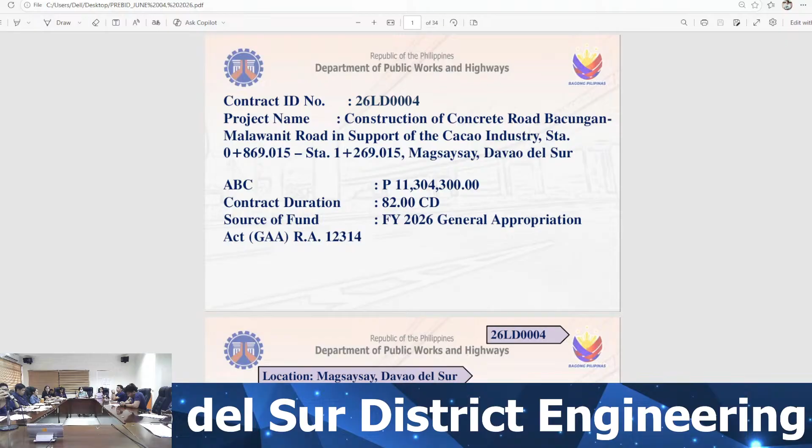Good morning, Madam Chair, my colleagues and visitors. I'm Barry Apitan from the planning design section, to discuss the three road projects.

First, with ID number 26LD0004, the project name is Construction of Concrete Road, Bacungan-Malawanit Road, in support of the Cacao Industry, Station 0+869.015 to Station 1+269.015, Magsaysay, Davao del Sur. ABC amount of 11,304,300 pesos, contract duration 82 calendar days. Source of fund FY26, the Appropriation Act RA 12314. Location: Barangay Bacungan, Magsaysay, Davao del Sur.

The project is shown in blue. Scope of work: concreting existing gravel road with a width of 6.7 meters or 3.35 meters, thickness of 0.28 meters with a shoulder width of 1.5 meters. The length of this project is 400 meters or 0.8 lane kilometer. There is also installation of paved shoulder with a thickness of 150mm and a width of 1.5 meters.

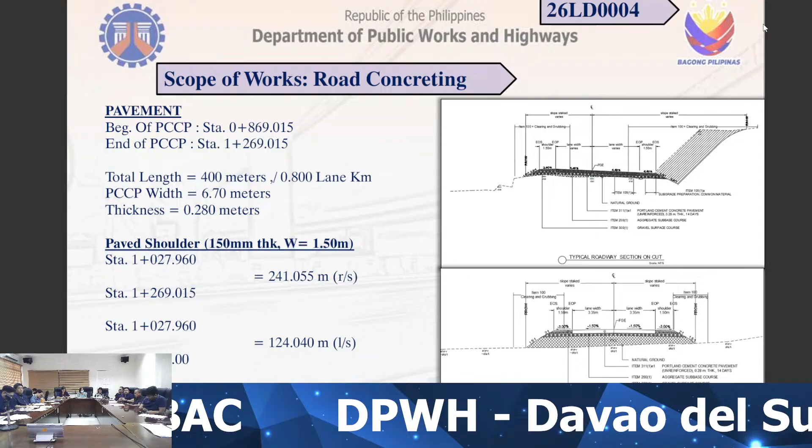Location at Station 1+027.96 to Station 1+269.015, a length of 241.055 meters, right side. Next, Station 1+027.96 to Station 1+160, a length of 124.040 meters, left side. Next, Station 0+980 to Station 1+000, a length of 20 meters, left side. Showing on screen, the typical roadway section and cut and fill portions of the project. There is also super elevation and widening block on this project.

Next, there's installation of RCPC using Class 4. On screen, the vertical sections show RCPC type 1 head wall. Next, on screen, the typical details of the head wall using stone masonry. Next, schedule of reinforced concrete pipe culverts using Class 4. First, lateral drainage on the left side of Station 1+078.295 to Station 1+086.295: install one line new 910mm diameter by 8 linear meter with head wall on both sides using stone masonry.

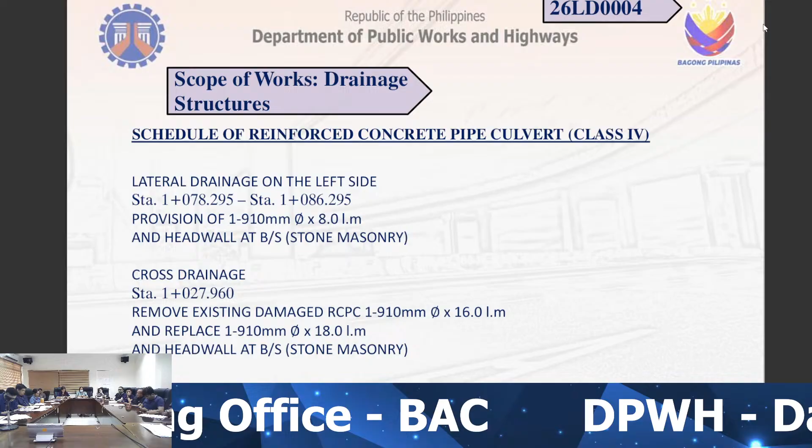Next, cross drainage location at Station 1+027.96: remove existing damaged RCPC one line 910mm by 16 linear meter and replace with one line new 910mm diameter by 18 linear meter, and provide head wall at both sides using stone masonry.

There's also installation of rectangular concrete line canal using 3000 PSI Class A and reinforcing steel bar grade 40. Location at Station 1+027.96 to Station 1+269.015, right side, a length of 241.055 meters. Next, Station 1+027.96 to Station 1+078.295, left side, a length of 50.33 meters. Next, Station 1+086.295 to Station 1+160, left side, a length of 73.705 meters. Showing on screen, the typical details of the line canal.

Clear width of 0.6, clear height of 0.7, and a thickness of 0.15 meters both sides.

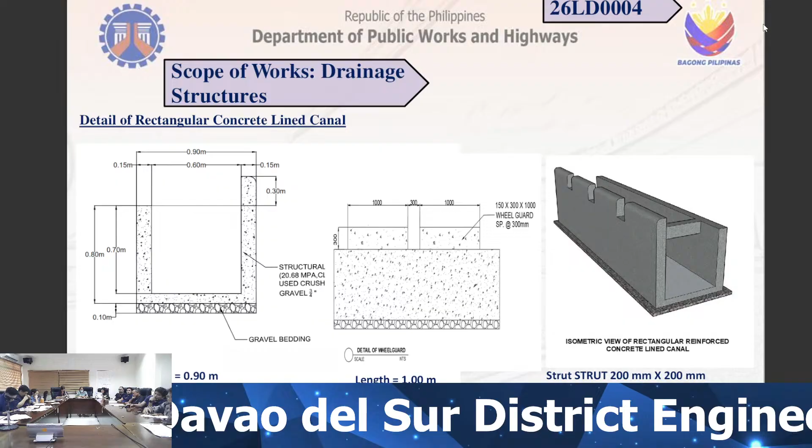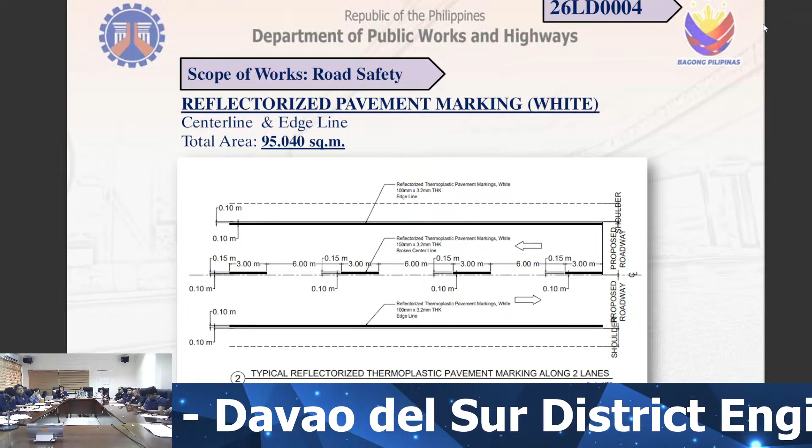Source of fund: FY26 Appropriation Act, RA 12314. The location is at Barangay Tres de Mayo, Digos City, Davao del Sur. This connects to last year's project in FY 2025.

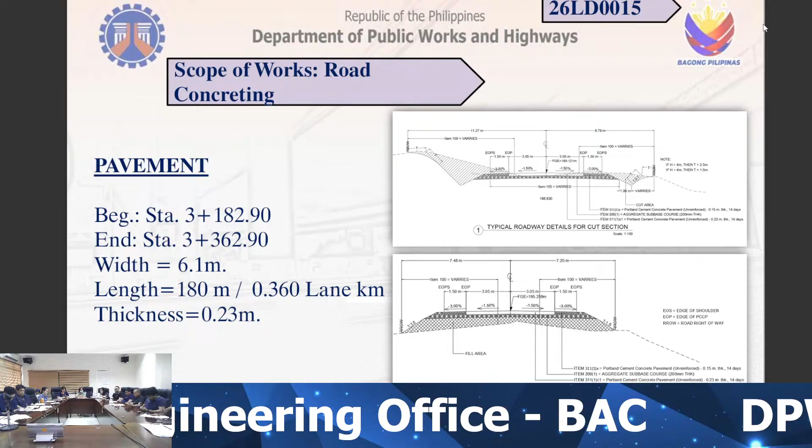Scope of work: concreting of road from Station 3 plus 182.9 to Station 3 plus 362.9, width of 3.05 meters both sides or 6.1 meters total, a length of 180 meters or 0.360 lane kilometer, and a thickness of 0.23 meters, with a shoulder width of 1.5 meters both sides. Showing on screen are the typical road details for the cut section and fill portions of the project.

Another scope of work: we install reinforced concrete pipe culverts using Class 4. Showing on screen is the river section of the RCPC with type S1 headwall, and the typical plan of headwall using stone masonry.

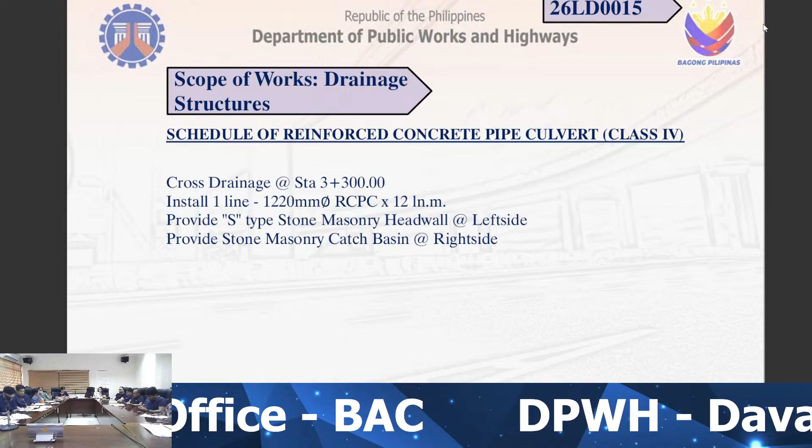Location for the reinforced concrete pipe culverts using Class 4 is at cross drainage Station 3 plus 300. Install one line new 1,220 mm diameter RCPC by 12 linear meters, and provide S-type stone masonry headwall on the left side and catch basin at the right side using stone masonry.

For road safety, we install thermoplastic pavement marking color white for the center line and edge lines of the project, an area of 45 square meters. That's all for contract 26LD0015.

Next, with contract ID number 26LD0017, project name Construction of Concrete Road, Tubod-Libertad-Bitaug Road, connecting Tribal Weavers Association (TWWA) and Davao-Cotabato Road, Cotabato section, in support of the weavers industry, Station 3 plus 247.74 to Station 3 plus

587.32, and Station 3 plus 977.09 to Station 4 plus 137.51, Bansalan, Davao del Sur, with an ABC amount of 11,586,540 pesos, contract duration 84 days. Source of fund: FY26 Appropriation Act, RA 12314.

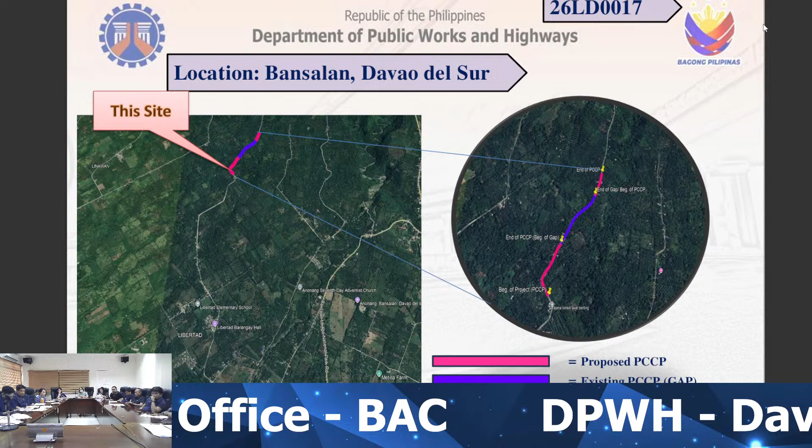The next site is at Station 3 plus 977.09 to Station 4 plus 137.51, a length of 160.42 meters, Site 2. There's also installation of paved shoulder, a thickness of 150 mm and width of 1.5 meters.

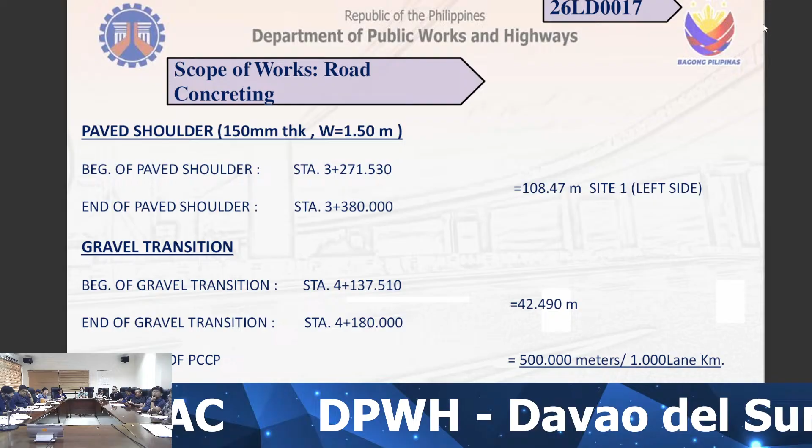The paved shoulder begins at Station 3 plus 271.53 to Station 3 plus 380, a length of 108.47 meters, located on the left side at Site 1.

There's a gravel transition, a length of 42.49 meters. The length of this PCCP is 500 meters or 1.0 lane kilometer, with a width of 3.35 meters both sides or 6.7 meters, and a thickness of 28 cm.

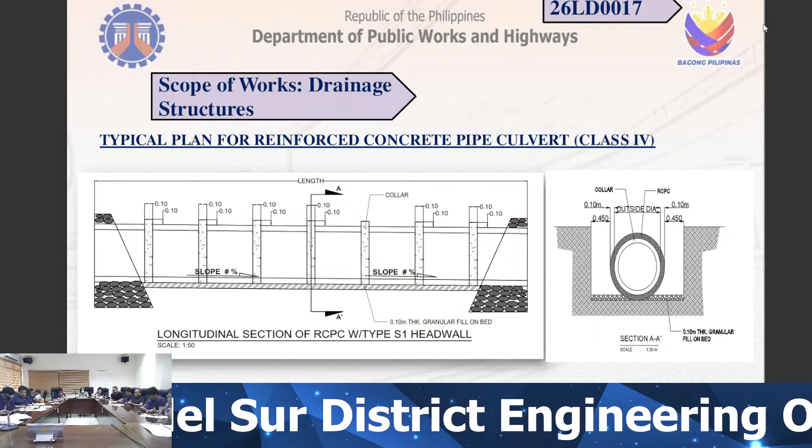Scope of work: installation of RCPC using Class 4. Showing on screen is the divided RCPC with Type S1 headwall, and the divided catch basin using stone masonry.

Next, application of reinforced concrete pipe culverts using Class 4. First, cross drainage at Station 3 plus

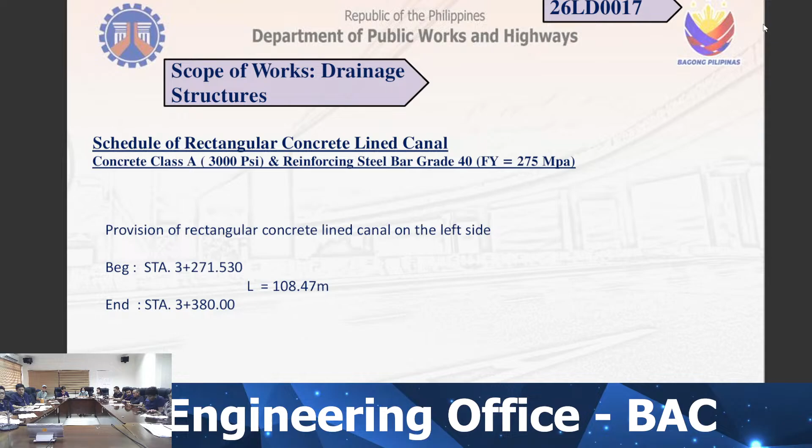Another scope of work is the installation of rectangular concrete lined canal, using concrete class A, 3,000 PSI, and reinforcing steel bar grade 40. Location is at station 3 plus 271.53 to station 3 plus 380, with a length of 108.47 meters on the left side.

Showing the typical details for this rectangular concrete lined canal: a clear width of 0.9 meters and a clear height of 0.9 meters. Thickness of the wall of the canal is 0.15 meters on both sides, and we use gravel aggregate for the canal bedding.

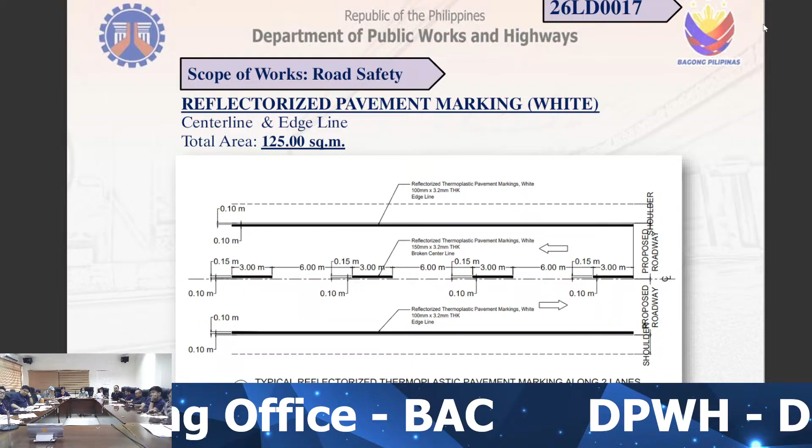Next, for road safety we install reflectorized pavement marking, color white, for the center line and edge line of the project, with a total area of 125 square meters. We also install reflectorized pavement marking, yellow, for the non-passing zone, with a total area of 8.89 square meters. That's all for the road projects.

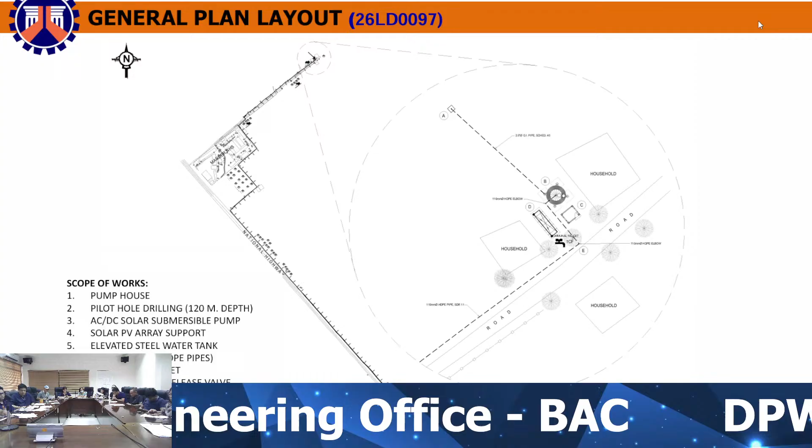This project is composed of pump house, pilot hole drilling, AC/DC solar submersible pump, solar PV array support, elevated steel water tank, pipelines, running faucets, and other appurtenances.

Typical details for pilot hole drilling, using a hole drilling rig. It can penetrate 250 mm diameter at 120 meters deep. The solar pump specifications use a DC submersible multi-speed solar pump with AC/DC auto switch controller.

This pump test data sheets and well log process record sheets will be used and submitted to the NWRB for water permit purposes.

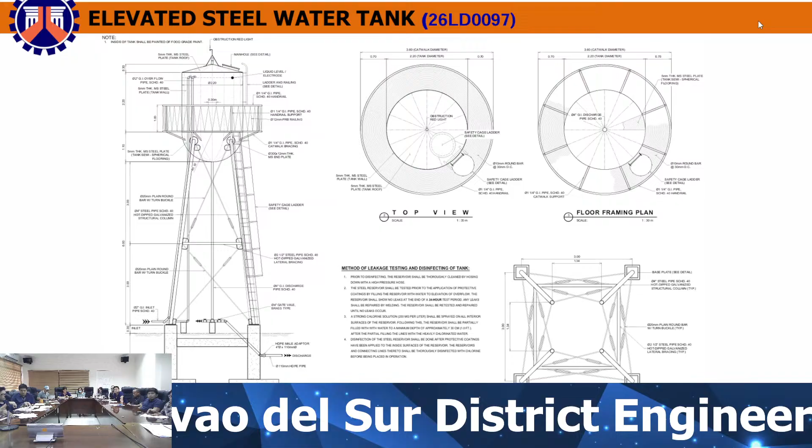Typical details for the elevated steel water tank, using structural concrete for pedestals, steel plate for shells, and for tanks.

Next, the footprint of the pump house is only 2 by 2.5 meters, around 5 square meters. Next, a footprint of solar PV panel support, which can carry 6 solar panels of 600 watts each.

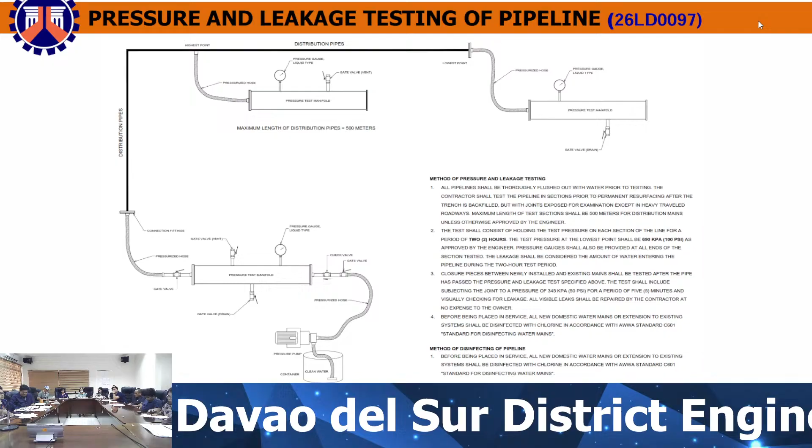This is the typical pressure and leakage testing for pipelines using pressure pumps and manifolds.

This is the summary of quantity for other general requirements: building permit, excavation permit, water permit from NWRB, earthworks, reinforced concrete works, finishing works, electrical works, mechanical works, and other water supply works.

Second, contract ID 26LD0125, construction of public water supply system, Bansalan, Davao del Sur. ABC amount of 9,900,000 pesos, contract duration of 210 calendar days, source of fund FY 2026 General Appropriation Act.

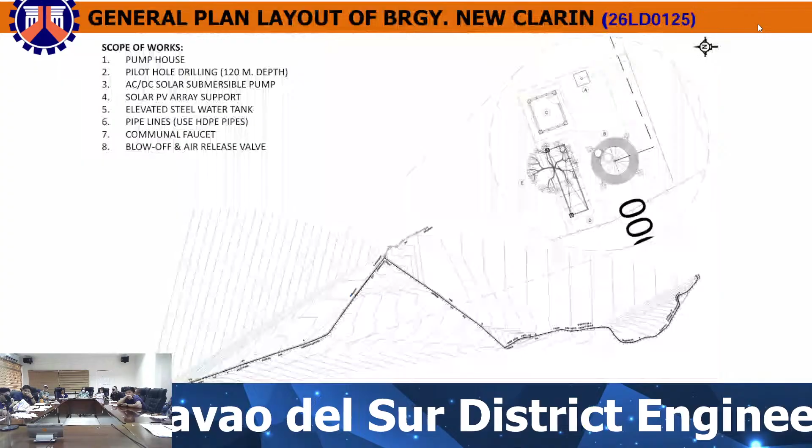These projects are composed of 2 barangays, Barangay New Clarin and Barangay Libertad, Bansalan. For Barangay New Clarin, the scope of work is pump house, pilot hole drilling, AC/DC solar submersible pump, solar PV support, elevated steel water tank, pipelines, and communal faucets.

For the scope of works for Barangay Libertad: pump house, pilot hole drilling, AC/DC solar submersible pump, solar PV support, concrete ground reservoir, pipelines, communal faucets, and other appurtenances.

Typical details for the pilot hole drilling for New Clarin. Equipment to be used is a drilling rig at 250 mm diameter that can penetrate 120 meters deep.

For pilot hole drilling for Barangay Libertad, going to the reservoir, equipment to be used is a drilling rig at 150 mm diameter at 120 meters deep.

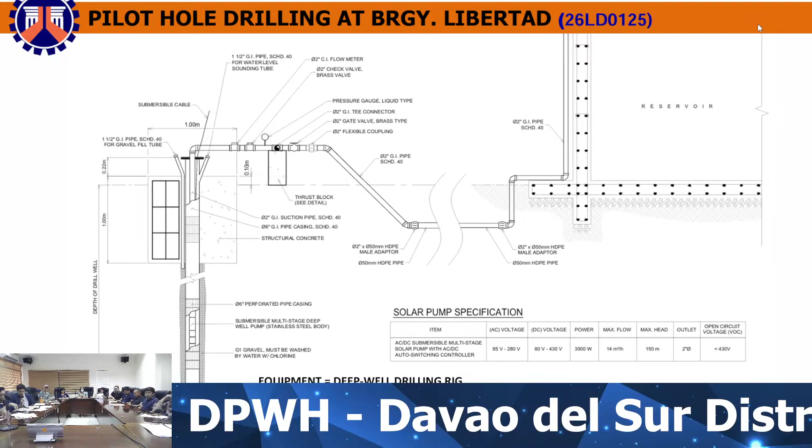These documents will be submitted to NWRB for water permit purposes.

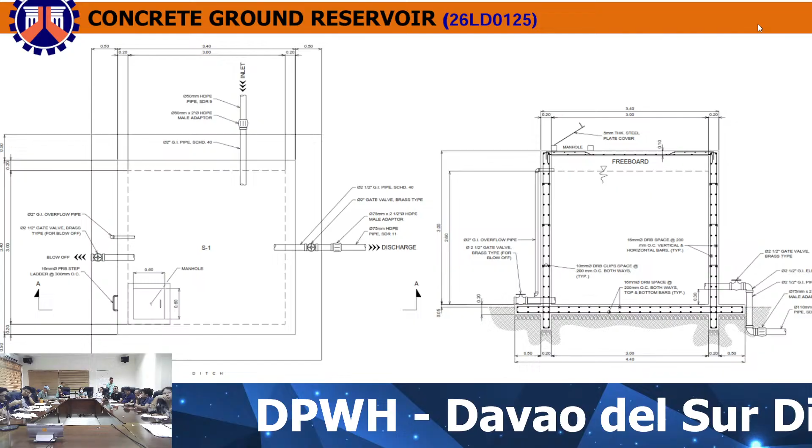It's a typical concrete ground reservoir using structural concrete having 3 by 3 internal dimensions and a 2.8 meters height.

Pump house using 2 by 2.5 meters, having 5 square meters.

Typical details for solar PV panel support that can carry 6 panels.

Pressure and leakage testing of pipelines can be tested using pressure pumps and manifolds up to a maximum length of 500 meters.

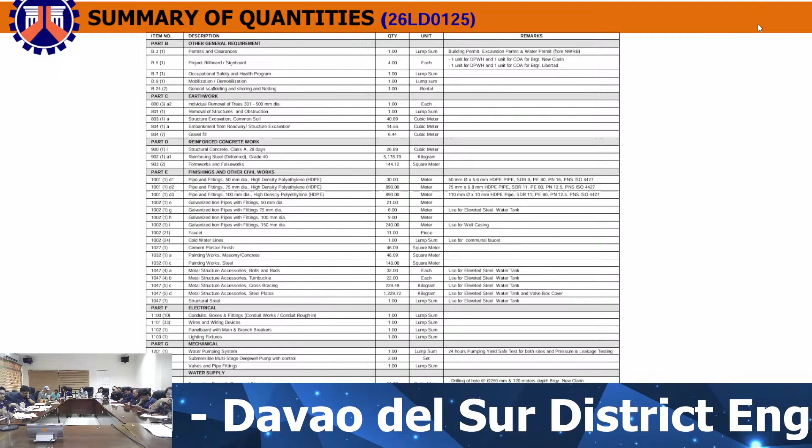For the summary of quantity, other general requirements: building permit, excavation permit, water permit, earthworks, reinforced concrete works, finishing works, electrical works, mechanical works, and water supply works, also for this water supply system.

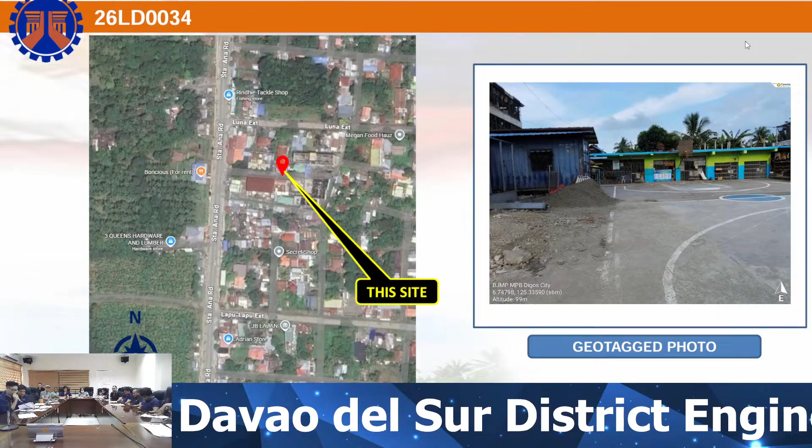Our building is a covered court. Here's the perspective. Here's our vicinity map showing the project location at the vicinity of BJMP in Digos City. And here's our geotag photo showing the existing court.

We included a suspended board and ring on one side, painting work, suspended board and ring for both sides, painting works, then concrete slab overlay with 100 mm thickness. No stage and no bleachers.

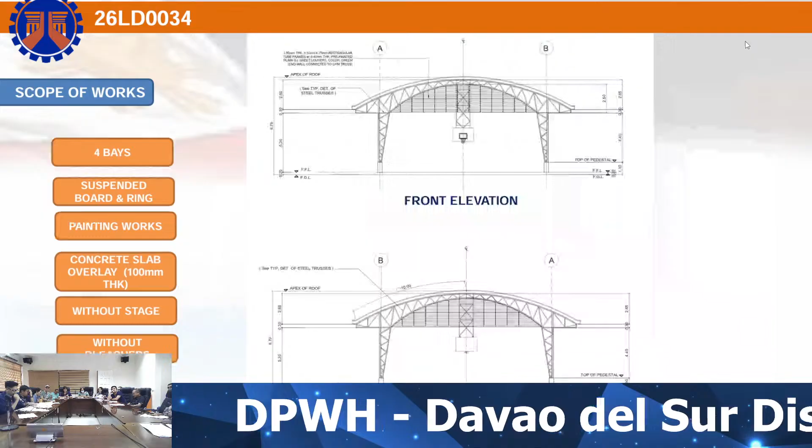Here's our elevation, the front and the rear, showing also the louvers. The site will only fit a 4 span covered court since we have limited space on their existing site.

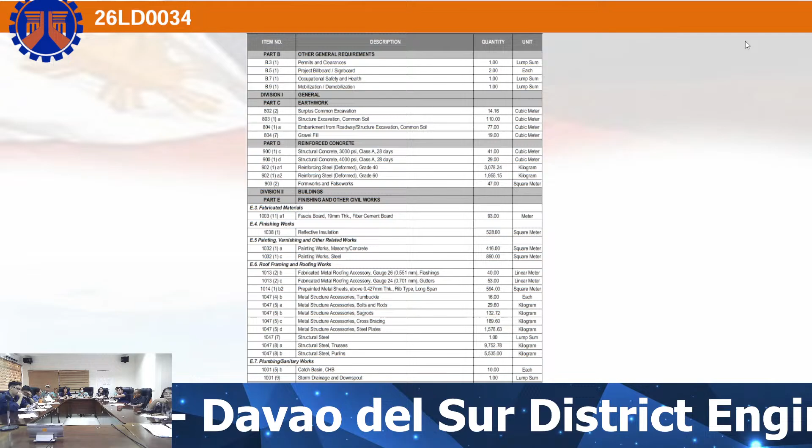For the summary of quantities, we have the general requirements, which include the permits and clearances. For earthwork, we have excavation, then embankment. For reinforced concrete, we have the 3000 PSI and 4000 PSI structural concrete, grade 40 and grade 60 reinforcing steel bars.

Under finishing and other civil works, we have fabricated materials into the fascia board, finishing works which include the reflective insulation, painting works, roof framing and roofing works, plumbing which includes the catch basin and storm drainage and downspout, then electrical works.

Now let's proceed to contract ID 26LD0035. The contract name is construction of multipurpose building, Barangay Hall, Barangay Balnate, Magsaysay, Davao del Sur, with an appropriation amount of 5 million pesos, ABC amount of 4,950,000 pesos, with a contract duration of 120 calendar days, funded under 2026 GAA or RA 12314.

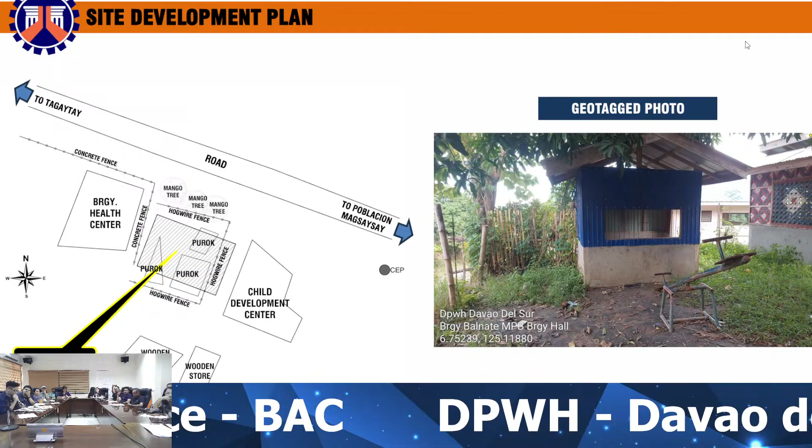Our project will be located at Barangay Balnate, near Balnate Elementary School. The LGU provided a transfer certificate of title for the proof of ownership. For the site development plan, the project will be located between the Barangay Health Center and the Child Development Center. There's also removal of the existing walks.

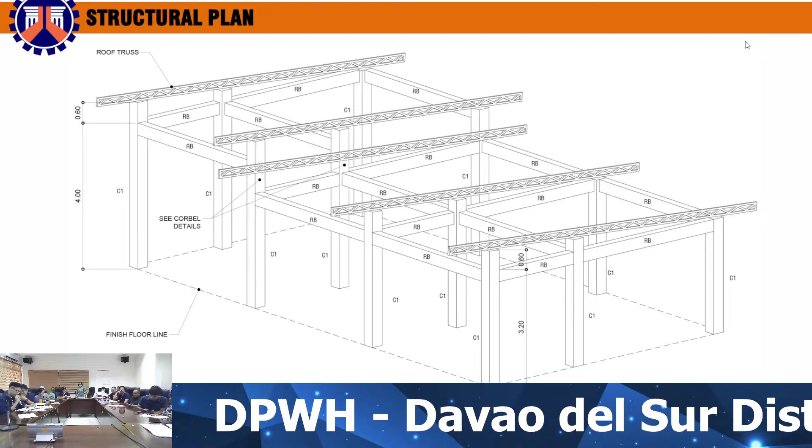It is mainly composed of reinforced concrete columns and beams, and then steel trusses for the roof framing. For the summary of quantities, we have the general requirements, the permits and clearances.

For contract ID 26LD0061, the contract name is construction completion of multipurpose building, gymnasium at PENRO, Digos City, Davao del Sur, an appropriation amount of 5 million pesos, an ABC amount of 4,950,000 pesos, with a contract duration of 90 calendar days, funded under 2026 GAA or RA 12314.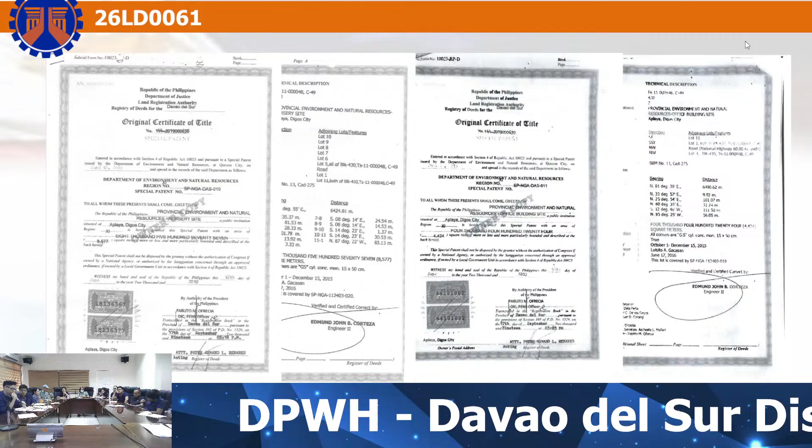For this project, it is a completion project for the existing gym. It will be located at Penro, near the Digos City bus terminal. Here's the geotag photo showing an existing slab or play court. Their office provided an original certificate of title for the lot ownership. Here is the vicinity map showing the existing structure.

Again, this is a completion project. For the scope of work, an additional one span will be provided. We provided a stage with a toilet and dressing room at the back, 3-tier bleachers around the play court, as well as canopy, suspended board and ring, and louvers.

Here's the elevation showing the louver details, the stage, the canopies, and bleachers. Again, the right side elevation and left side elevation.

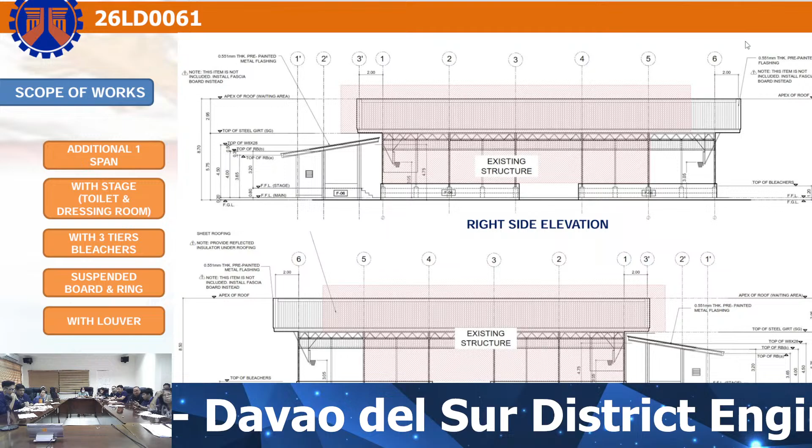So the added span would be composed of the metal truss structure or angle bars, truss details. Then we have the grade 60 and grade 40 reinforcing steel bars for the reinforced concrete pedestals. Then 2 mm thick by 50 by 150 mm rectangular tube for the purlins.

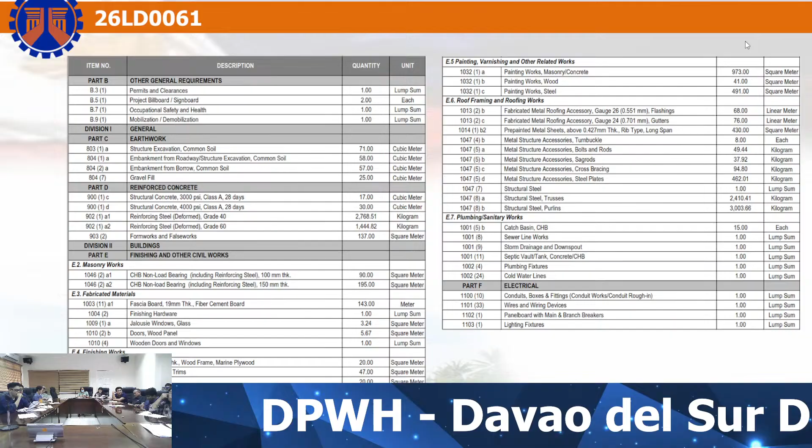12314. Here's our vicinity map showing the location, which will be located at Barangay Piape, near Maria Cleta de los Santos National High School. Here's a geotag photo. So for the ownership, the LGU provided a donation. So here's the site.

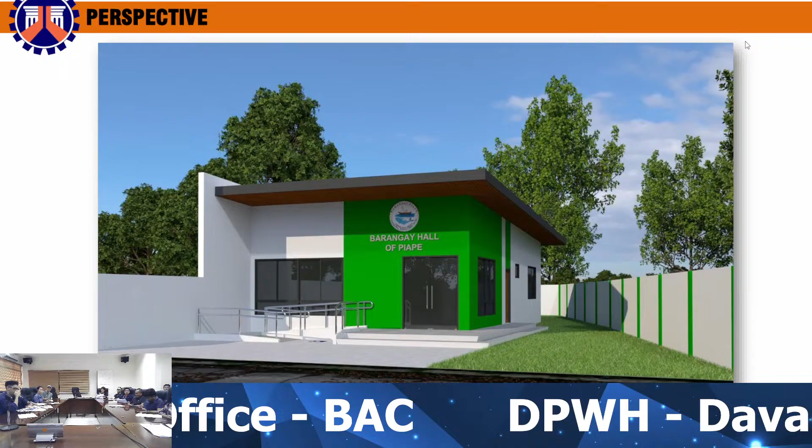So here's the perspective for our barangay hall, a non-typical design.

So the building really has a dimension of 8 meters by 12 meter dimension, or total floor area of 96 square meters. So we will be attached on a firewall. The space is provided on the following: a porch, a lobby, a staff clerical office, pantry, PWD toilet, session hall, then head office.

The building will be composed of reinforced concrete columns and beams and steel trusses for the roof framing.

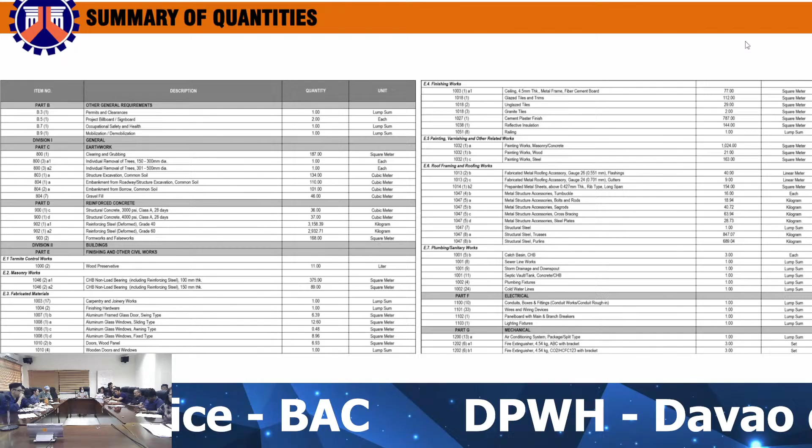So for the summary of quantities, we have the general requirements, the permits and clearances, and under earthwork we have the individual removal of trees, excavation and embankment. For reinforced concrete, we have the 3,000 and 4,000 psi structural concrete, for grade 40 and grade 60 reinforcing steel bars. Under finishing under civil works, we have the wood preservative, masonry works, CHB walls, the 100 mm thick and 150 mm thick CHB walls, fabricated materials such as the doors and the windows. For finishing works, we have the tile works, the ceiling, reflective insulation.

For painting works, for the whole project, roof framing and roofing works. Then under plumbing and sanitary works, we have the catch basin, sewer line works, cold water line works, plumbing fixtures, septic vault, storm drainage and downspout. Then electrical works. Then under mechanical works, we included an air conditioning system and fire extinguishers.

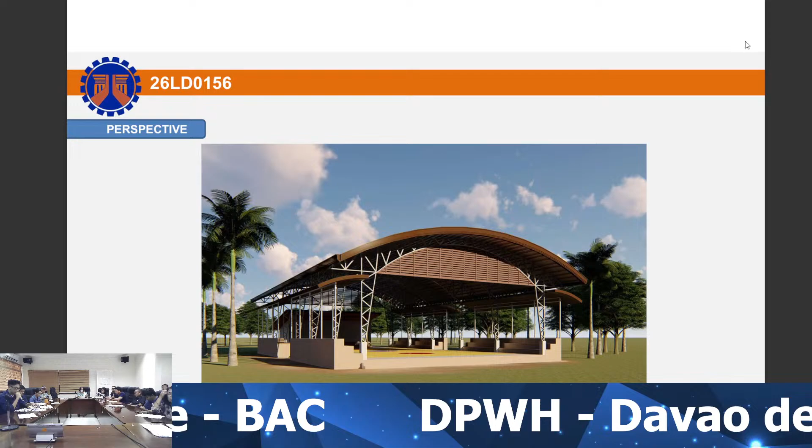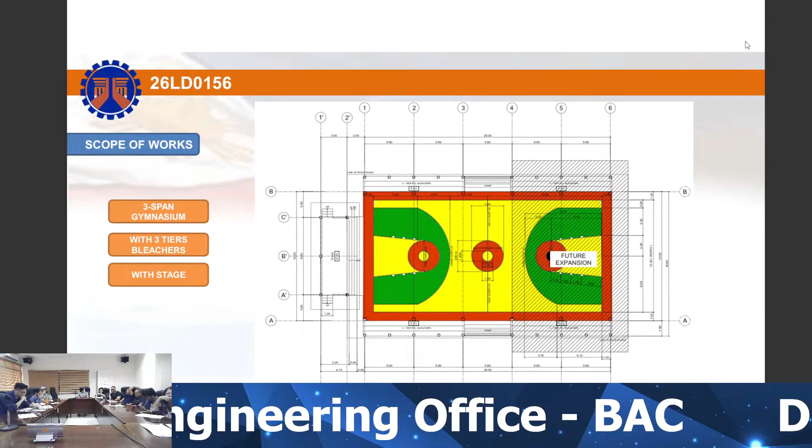So for this project, it would only include 3-span play court with bleachers and a stage. So here's our elevation, our front elevation and rear elevation. So it is a progressive type building which only includes 3-span.

For the metal truss structure, we composed of angle bars, then grade 60, grade 40 reinforcing steel bars, and then 2 mm thick by 50 by 150 mm rectangular tube for the purlins.

So for the summary of quantities, we have the general requirements, the permits and clearances. Under earthwork, we have the removal of trees, excavation embankment. For reinforced concrete, we have the 3,000 and 4,000 psi structural concrete and grade 40, grade 60 reinforcing steel bars. Under finishing and other civil works, we have the masonry works, finishing works, painting works, roof framing, plumbing which includes a catch basin and storm drainage and downspout, then electrical works.

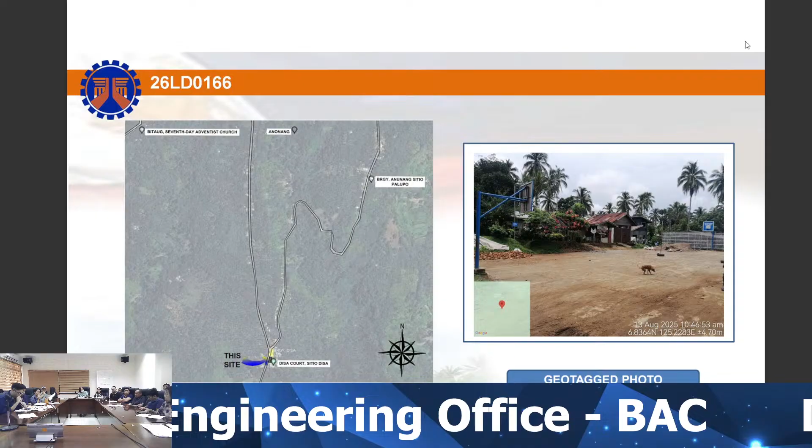12314. Next, so our gymnasium, typical perspective. So here's the vicinity map, which is located right near the barangay center. Here's an existing play court.

So the LGU provided a deed of donation for the lot ownership. So our building will be located at their existing play court. Here's the site development plan.

So our project will include a 28 meters by 15 meters play court, then with an attached stage at the side, 3-tier bleachers around the play court. We will also include the canopy and the suspended board and ring.

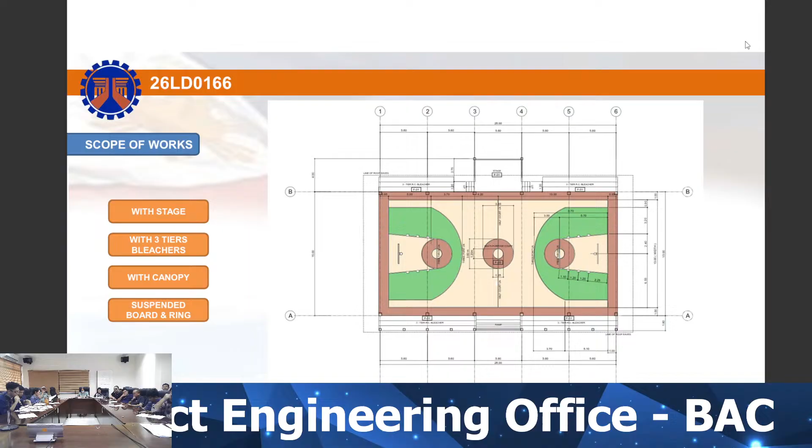For the summary of quantities, we have the general requirements, the permits and clearances. For the earthwork, we have removal of structure or the existing play court, structure excavation, and embankment. Then we have the reinforced concrete, the 3,000 and 4,000 PSI structural concrete with grade 40 and grade 60 reinforcing steel bars. For finishing and other civil works, we have the masonry works, finishing works which include the reflective insulation, painting works, roof framing works, plumbing which includes the catch basin and storm drainage and downspout, then electrical works.

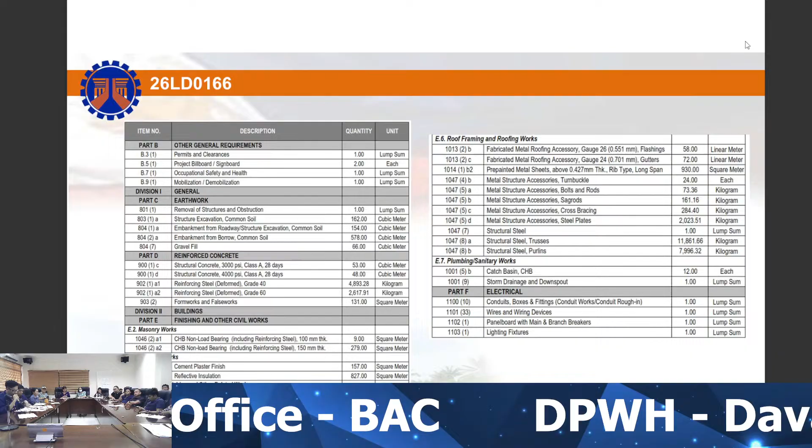For contract ID 26LD0169, the contract name is construction of multipurpose building, Barangay Hall, Barangay Balastiao, Kiblawan, Davao del Sur, with an appropriation amount of 5 million pesos, and ABC amount of 4,950,000 pesos, with a contract duration of 90 calendar days, funded under 2026 GAA or RA 12314.

Our project will be located at Barangay Balastiao. Here's the vicinity map and the geotag photo. The LGU provided a deed of absolute sale and transfer certificate of title for the lot ownership. The proposed barangay hall will be located near or beside their existing gym.

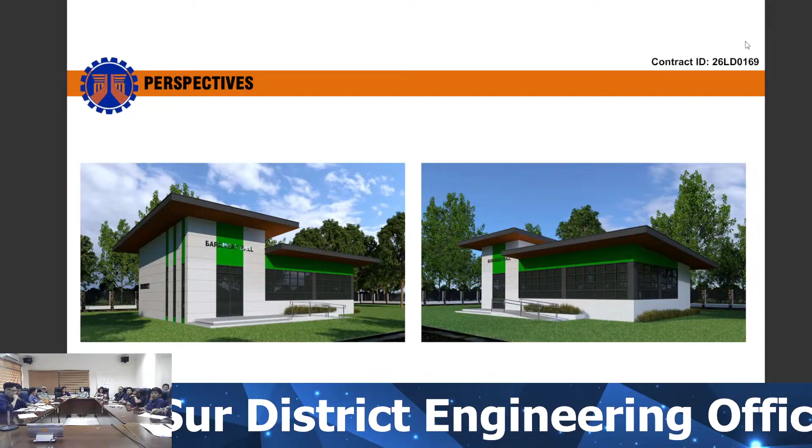Here's the one-story barangay hall perspective. The project has a total floor area of 120 square meters, with dimensions of 15 meters by 8 meters. Spaces provided are the following: main entrance, a lobby, staff or clerical office, PWD toilet room, pantry, session hall, head office, and service entrance.

The building will mainly be composed of reinforced concrete columns and beams and steel truss. For the roof framing, here's a typical roof truss detail showing angle bars for the trusses.

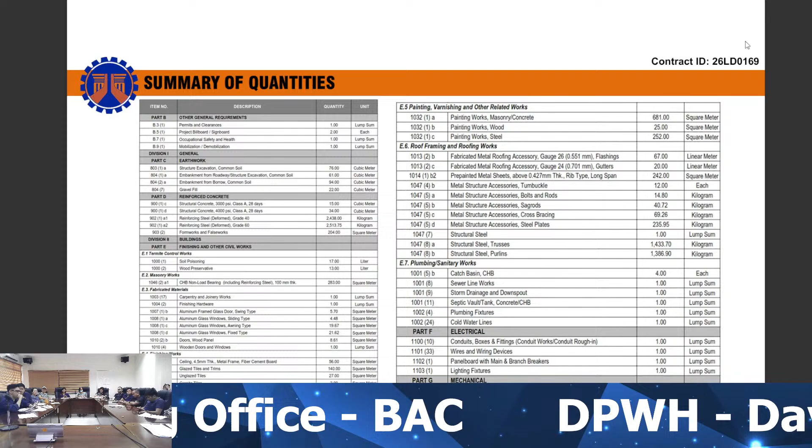For the summary of quantities, we have general requirements, permits and clearances, earthwork and excavation embankment, reinforced concrete with 3,000 and 4,000 PSI structural concrete, and grade 40 and grade 60 reinforcing steel bars. For finishing and other civil works, we have termite control works, masonry works, fabricated materials such as doors and windows, finishing works such as tile works, ceiling, reflective insulation, painting works, roof framing and roofing works, plumbing which includes catch basin, storm drainage and downspout, sewer line works, cold water lines, plumbing fixtures, and septic vault, electrical works, and for mechanical works we included an air conditioning system and fire extinguishers.

For contract ID 26LD0171 with contract name construction completion of multipurpose building tribal hall at Barangay Balabag, Digos City, Davao del Sur, with appropriation amount of 2,500,000 pesos and ABC amount of 2,475,000 pesos, with a contract duration of 60 calendar days, funded under 2026 GAA.

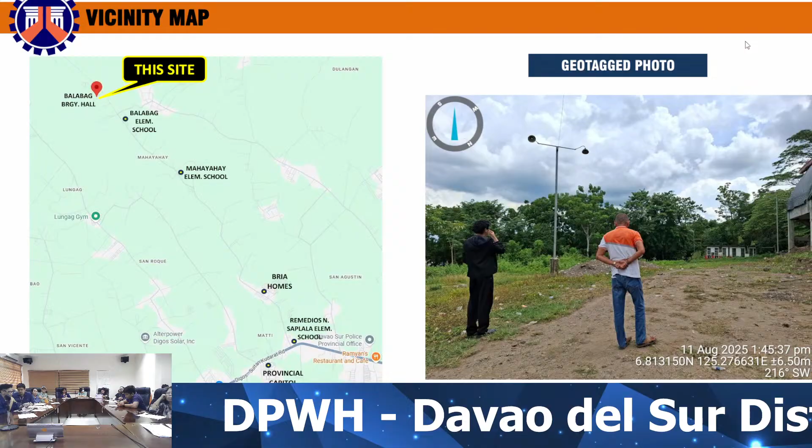The tribal hall will be located at the barangay site in Balabag. Here's the vicinity map and the geotag photo. The LGU provided extrajudicial settlement with deed of absolute sale for the lot ownership.

The barangay hall, I mean the proposed tribal hall, is located near their station.

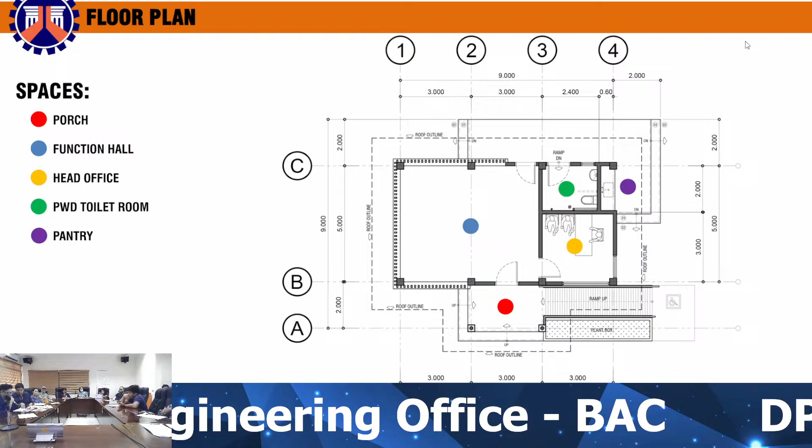The building will be composed of reinforced concrete columns and beams and steel trusses. For the summary of quantities, we have the general requirements and permits and clearances.

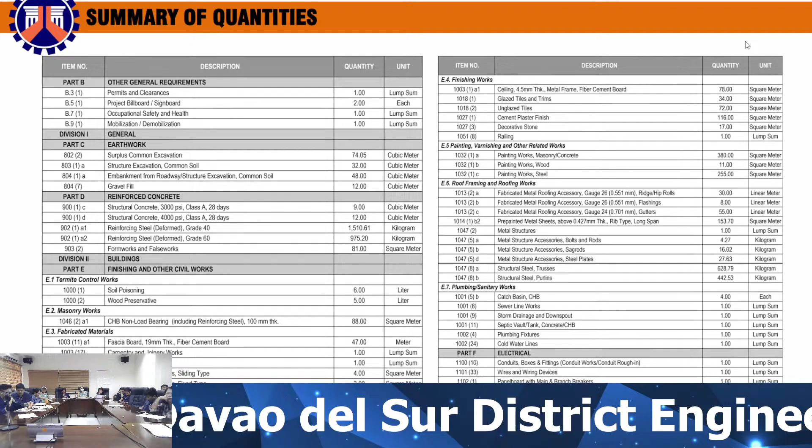For earthwork, we have excavation and embankment. Reinforced concrete, which is the 3,000 and 4,000 PSI structural concrete under grade 40 and grade 60 reinforcing steel bars. Under finishing and other civil works, we have termite control works, soil poisoning and wood preservative, masonry works, fabricated materials such as doors and windows, then finishing works such as tile works and ceiling, painting works, roof framing and roofing works, plumbing which includes catch basin, sewer line works, cold water lines, septic vault, storm drainage and downspout, electrical works, and then mechanical works, we included the air conditioning system.

For contract ID 26LD0178, contract name Construction Completion of National Irrigation Administration Building, Digos City, Davao del Sur, with an appropriation amount of 10 million pesos and ABC amount of 9,900,000 pesos, with a contract duration of 150 calendar days, funded under 2026 GAA or RA 12314.

For the vicinity map, the building would be the completion project at National Irrigation Administration Building or office. For proof of ownership, they provided an original certificate of title, the vicinity map, or the site development plan.

Here's the perspective, but this is a progressive type project, so it's not yet done. The building has a total floor area of 922 square meters, or 461 square meters in each floor. The building is a two-story building.

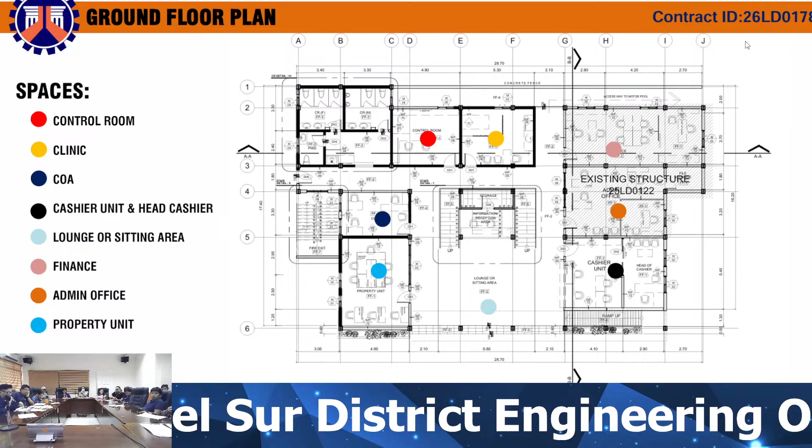The project will only include the structural components of the building, which includes the footing, the substructure, the superstructure, and the roofing. The building is composed mainly of wide flange or I-beams. There's the framing.

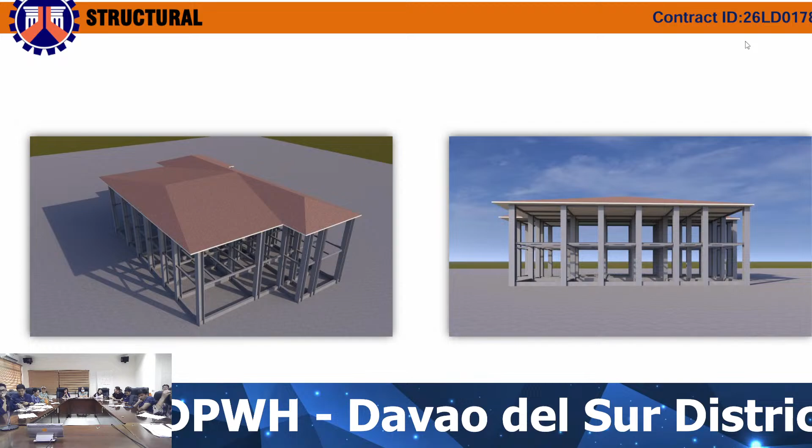So the building. Here's the roof framing. Mainly this would be the output for this project, just the structural components.

So for the summary of quantities, you have the general requirements, the permits and clearances. For the earthwork, we have the excavation and embankment. For reinforced concrete, we have the 4,000 PSI structural concrete only. The slabs are not included in this project. Reinforcing steel, grade 40 and grade 60. Under finishing and other civil works, you have the painting works for the steel or the I-beams, roof framing and roofing works, then structural steel. That's it.

So for contract ID number 26LD0179, for the contract name construction of multipurpose building evacuation center, Barangay Bagong Silang, Kiblawan, Davao del Sur, with an appropriation amount of 5 million pesos, an ABC amount of 4,950,000 pesos, with a contract duration of 120 calendar days, funded under 2026 GAA or RA 12314.

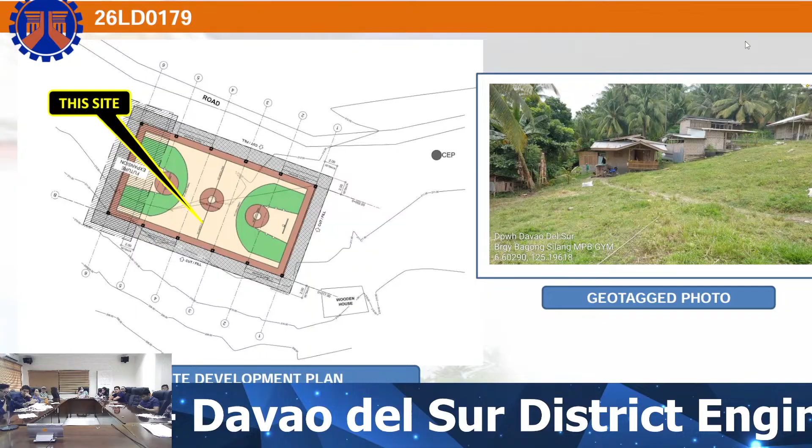So again, the perspective for the gym or evacuation center gym type. Here's a vicinity map. And the geotag photo. The LGU provided a deed of absolute sale for the lot ownership. Again, here's the site development plan.

So mainly, there's no reference building nearby. So our project will only include the 4-span play court, no stage, but with bleachers, 2-tier bleachers, then suspended board and ring. Without suspended board and ring, because this is a progressive type building. So here's the elevation, no louvers as well.

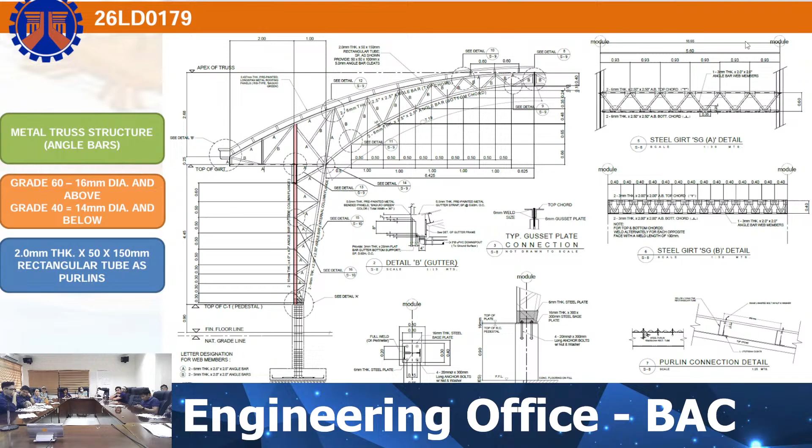So it will mainly compose of metal truss structure, grade 60, grade 40 reinforcing steel bars for the reinforced concrete pedestals, 2 mm thick by 50 by 150 mm rectangular tube for the purlins.

For general requirements, we have the permits and clearances. For earthwork, we have the embankment and excavation, reinforced concrete, which includes 3,000 and 4,000 PSI structural concrete, and grade 40 and grade 60 reinforcing steel. Then under finishing and other civil works, you have the masonry works, finishing works, which includes the reflective insulation, painting works for the bleachers and steel structures, roof framing and roofing works. For plumbing, we have the storm drainage, then electrical works.

For contract ID 26LD0180, for construction of multipurpose building evacuation center, Barangay Sinawilan, Digos City, Davao del Sur, with appropriation amount of 5 million pesos, an ABC amount of 4,950,000 pesos, with a contract duration of 120 calendar days, funded under 2026 GAA or RA 12314. Again, our typical gym type evacuation center perspective.

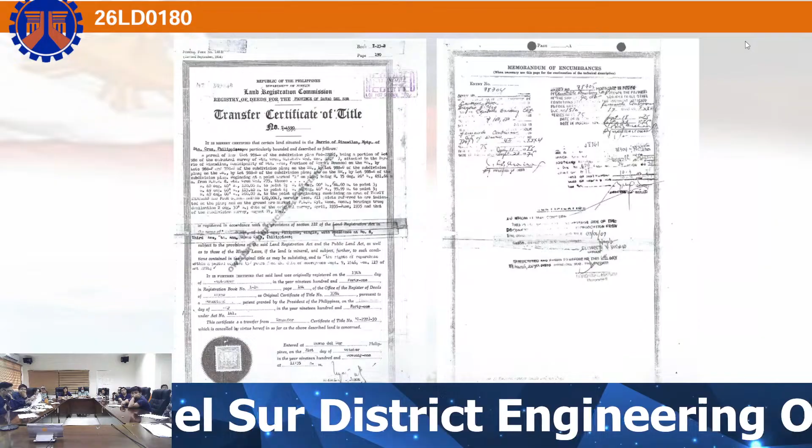Here's a vicinity map and geotag photo showing an existing court. The LGU provided a transfer certificate of title for the lot ownership. So here's the site development plan.

This project will have 5 bays, with 5 meters span on each bay. We provided a suspended board and ring, painting works, overlay, 100 mm thick concrete slab, without stage and without bleachers.

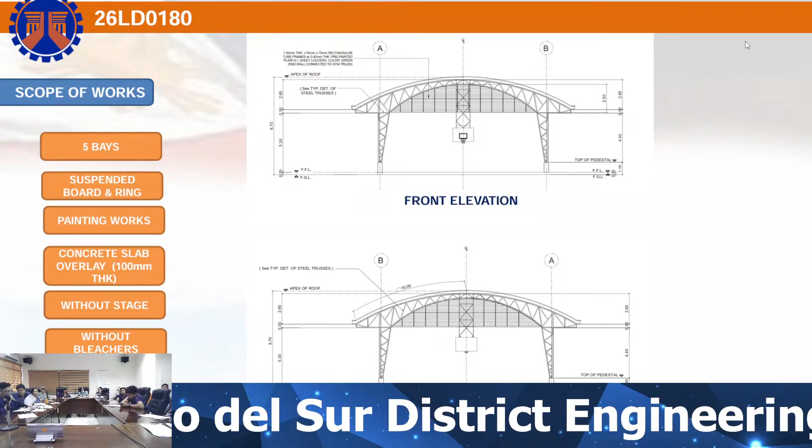Here's the elevation, the front and the rear, also showing the louvers. Here's the right side and left side elevation. The project will be composed of metal truss structure, with grade 60 and grade 40 reinforcing steel bars on the reinforced concrete pedestals. Then 2 mm thick by 50 by 150 mm rectangular tube for the purlins.

For summary of quantities, we have the general requirements, the permits and clearances, earthwork, the embankment and excavation, reinforced concrete, the 3,000 and 4,000 PSI structural concrete, under grade 40 and under grade 60 reinforcing steel bars. Under finishing and other civil works, we have the painting works, roof framing and roofing works, plumbing, which includes the storm drainage and the catch basin, then electrical works.

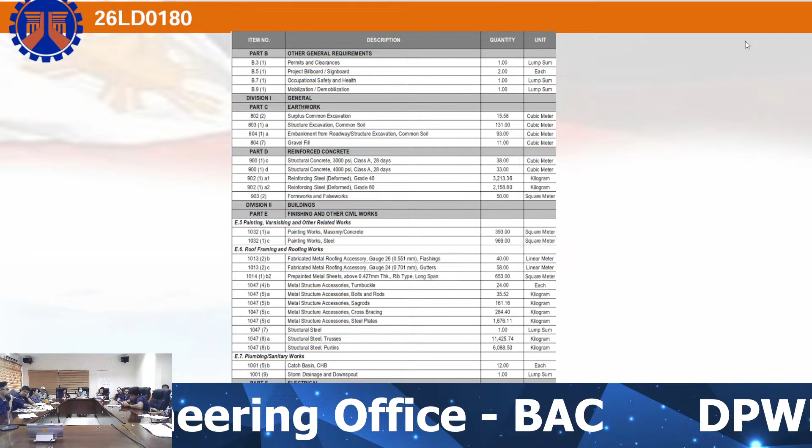For contract ID 26LD0186, or with the contract name, construction, completion of multipurpose building, social hall at Rizal Elementary School, Barangay Rizal, Davao del Sur, an appropriation amount of 2 million pesos, and ABC amount of 1,980,000 pesos, with a contract duration of 70 calendar days, funded under 2026 GAA or RA 12314.

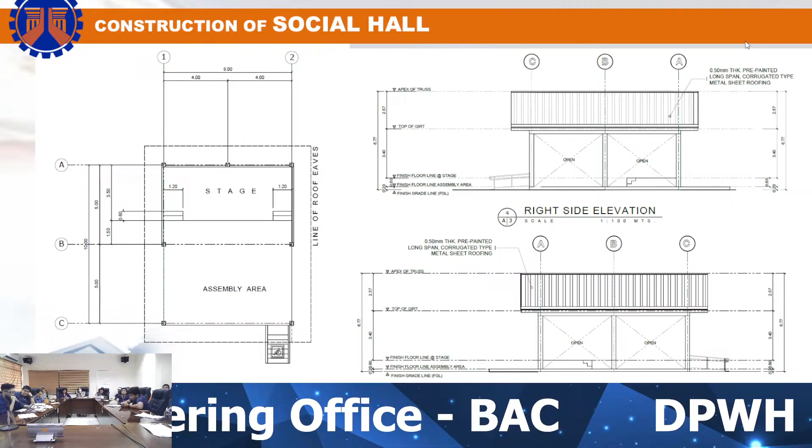The building would only compose of, would maybe have a dimension of 10 meters by 8 meters or 80 square meters, a total area of 80 square meters. There's an elevation as well. So for the structural components, it will mainly compose of reinforced concrete columns and beams and metal truss.

So for the summary of quantities, we have the general requirements, the permits and clearances. For earthwork, we have removal of trees, excavation embankment, reinforced concrete, which is the 3,000 and 4,000 PSI structural concrete, under grade 40, grade 60 reinforcing steel bars.

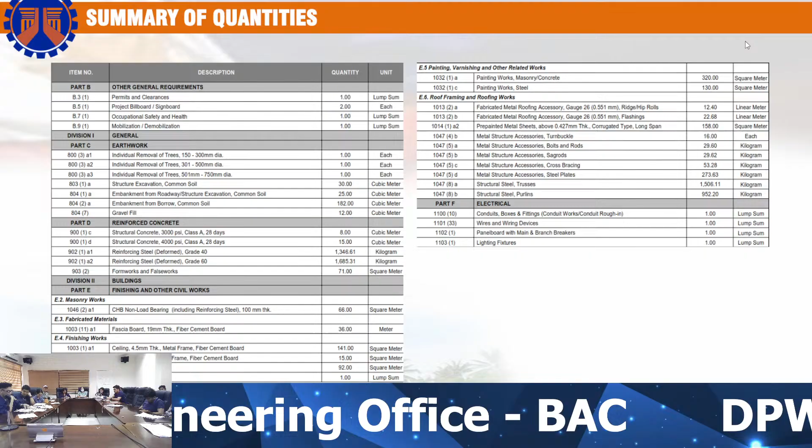Under finishing and other civil works, we have the masonry works, fabricated materials, finishing works, the shutters and ceiling, and then the painting works, roof framing and roofing works, then electrical works.

For contract ID 26LD0187, with the contract name construction completion of multipurpose building canteen, Digos City Senior High School, 341503, Barangay Iktit, Digos City, Davao del Sur, with an appropriation amount of 2 million pesos, an ABC amount of 1,980,000 pesos, with a contract duration of 70 calendar days, funded under 2026 GAA or RA 12314.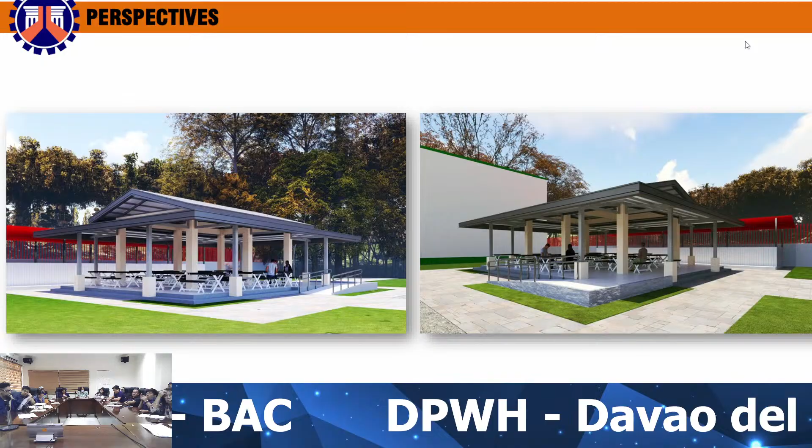So again, our project will be located at Digos City Senior High School, Iktit. Here's the photo. So here's the site development plan, which will be located near their existing canteen and near their guardhouse. For the lot ownership, the school provided a contract of use of ground. Here's the perspective for the canteen.

It has a total area of 120 square meters. Here's the spaces provided, the canteen or the dining area, and then a hand wash. Here's the structural component. It is composed of reinforced concrete columns and beams, and then the steel trusses for the roof framing.

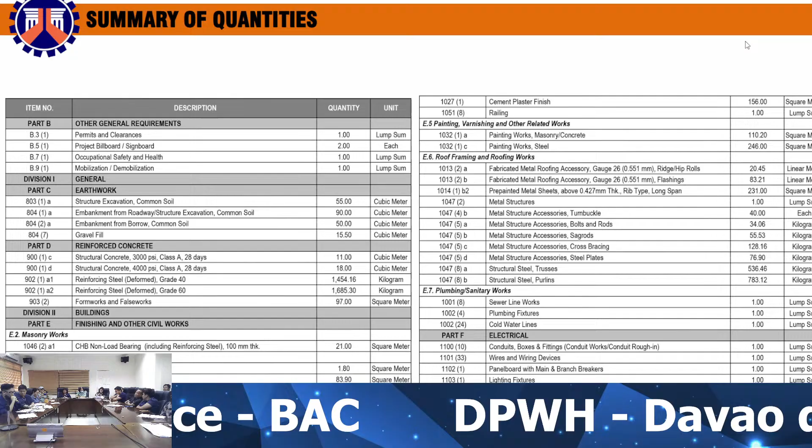For the summary of quantities, we have the general requirements, the permits and the clearances. Then for the earthwork, we have the excavation embankment. Under reinforced concrete, we have the 3,000 and 4,000 PSI structural concrete, and the grade 40 and grade 60 reinforcing steel.

Then under finishing and other civil works, we have the masonry works, finishing works, which are the tile works, painting works, roof framing and roofing works, plumbing, which includes the sewer line and the plumbing fixture for the hand wash, electrical works. That's it for the building projects.

For agenda number 1B, the requirement of bidding documents, including instruction to bidders, general condition of contract, special condition on the specification, drawings, bill of quantities, and forms.

For agenda number 1C, documents to be submitted by the bidders. And for agenda number 1D, criteria and procedure for eligibility check, preliminary examination of bids, detailed evaluation of bids, post-qualification, and award. These three requirements to be discussed by Engineer Nibolos.

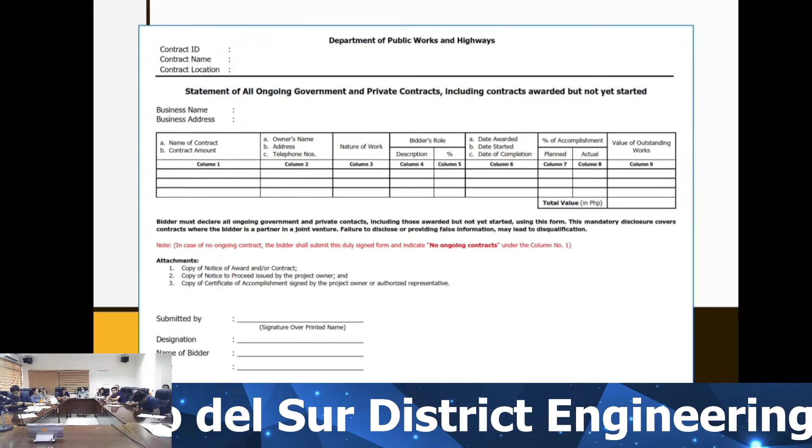Attachments: 1. Copy of notice of award and/or contract. 2. Copy of notice to proceed issued by the project owner. And 3. Copy of certificate of accomplishment signed by the project owner or authorized representative. In case of no ongoing contract, the bidder shall submit this duly signed form and indicate no ongoing contracts under column number 1.

Dual purpose of the statement of all ongoing contracts: it is relevant in relation to the computation of the NFCC formula. The value of all outstanding or uncompleted portions of ongoing contracts will be deducted from the product of the current assets minus liabilities multiplied by 15.

Hence, for the procuring entity to determine the correct computation of the NFCC, the bidder shall declare all of its ongoing government and private contracts, including contracts awarded but not yet started, if any, whether similar or not similar in nature and complexity to the contract to be bid.

The statement of all ongoing government and private contracts still has its significance in relation to the verification on the bidder's performance in its ongoing contracts during post-qualification process. Fourth, statement of single largest completed contract, or SLCC, similar to the contract to be bid, in accordance with instructions to bidders, clause 5.5.

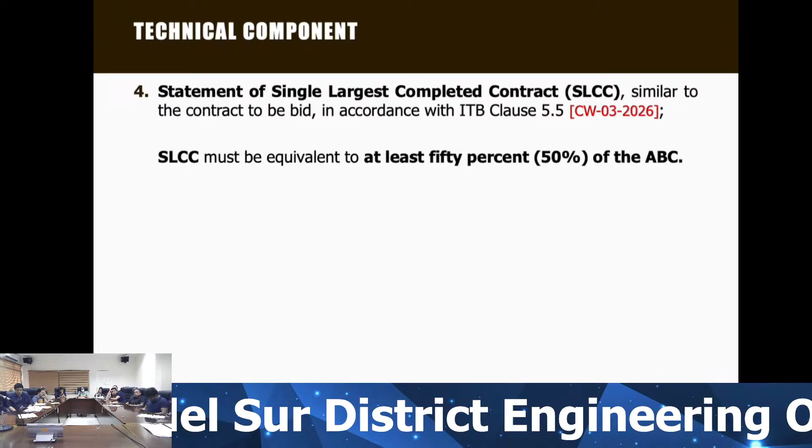SLCC must be equivalent to at least 50% of the ABC. Use the prescribed template provided in the bidding documents. Attachments: 1. Copy of contract. 2. Copy of certificate of completion. 3. Copy of certificate of final acceptance issued by the project owner other than the contractor, or a final rating of at least satisfactory in the constructor's performance evaluation system. In case of contracts with the private sector, an equivalent document shall be submitted.

Fifth, net financial contracting capacity, or NFCC computation, in accordance with instructions to bidders, clause 5.6. Computation as follows: current assets minus current liabilities, multiplied by 15, minus the value of all outstanding or uncompleted portions of projects under ongoing contracts, including awarded contracts yet to be started, coinciding with the contract to be bid. NFCC must be at least equal to the ABC. Use the prescribed template provided in the bidding documents.

Attachments: 1. Copy of latest audited financial statement, or AFS, and 2. Copy of proof of receipt for AFS submitted to the BIR. Confirmation receipt for online submission, or BIR receipt stamp for manual submission.

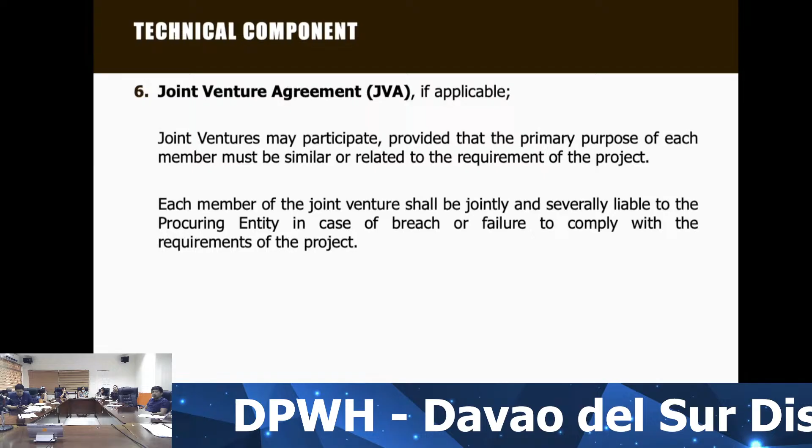Sixth, joint venture agreement, if applicable. Joint ventures may participate, provided that the primary purpose of each member must be similar or related to the requirements of the project. Each member of the joint venture shall be jointly and severally liable to the procuring entity in case of breach or failure to comply with the requirements of the project.

Seventh, bid security in the prescribed form and amount in accordance with instructions to bidders, Clause 16, and validity period under Clause 15. The bid security shall be in the form of a bid securing declaration, or any of the following: an amount of not less than 2% of the ABC if bid security is in cash, or not less than 5% of the ABC if bid security is in surety bond. Bids and bid security shall be valid for 120 calendar days from bid opening.

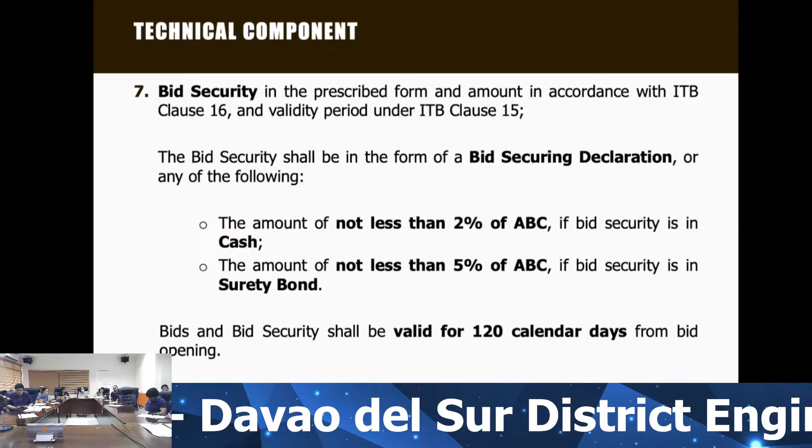Eighth, project requirements, which shall include the following: 1. Organizational chart for the contract. Use the prescribed template provided in the bidding documents. 2. List of contractors' key personnel to be assigned to the contract with their qualification data. These personnel must meet the required minimum years of experience set in the bid data sheet.

Use the prescribed template provided in the bidding documents. Attachments: letter of nominee, notarized certificate of employment, biodata, copy of PRC ID, PTR, TIN, and certificate of accreditation and/or training. Key personnel, particularly the project manager, project engineer, and materials engineer, must be different persons.

Accredited safety officer required upon issuance of notice of award, subject to Department Order Number 35, Series of 2021. First aider with certificate of training issued by the Red Cross in compliance with Department of Labor and Employment requirements for the approval of construction safety and health program, required upon issuance of notice of award, subject to Department Order Number 35, Series of 2021.

Compliance to DOLE Department Order Number 252, Series of 2025. Revised implementing rules and regulations of Republic Act Number 11058, entitled An Act Strengthening Compliance with Occupational Safety and Health Standards and Providing Penalties for Violations thereof.

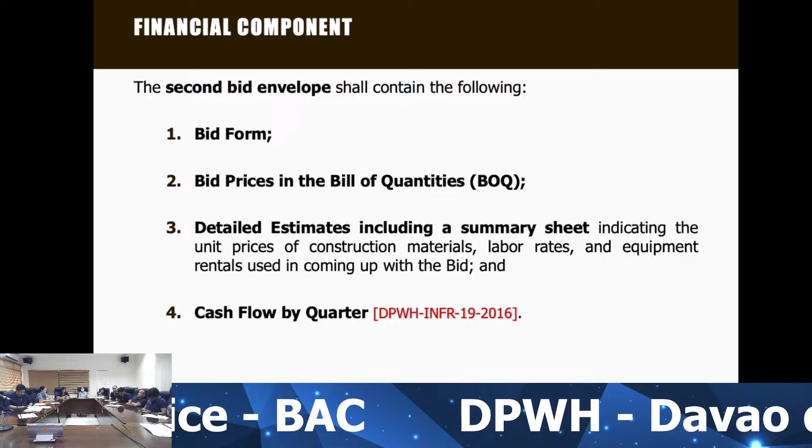The second bid envelope, or the financial component, shall contain the following: 1. Bid form. 2. Bid prices in the bill of quantities. 3. Detailed estimates including a summary sheet indicating the unit prices of construction materials, labor rates, and equipment rentals used in coming up with the bid. And 4. Cash flow by quarter. Use the prescribed template provided in the bidding documents.

Format and signing of bids. Bidders shall submit their bids through their duly authorized representative using the appropriate forms provided in Section 9, Philippine Bidding Documents related forms, on or before the deadline specified in ITB Clause 19, in 2 separate sealed bid envelopes, which shall be submitted simultaneously, whether through manual or online electronic submission. The first envelope shall contain the technical component of the bid, including eligibility requirements under ITB Clause 12, and the second envelope shall contain the financial component of the bid.

Forms as mentioned in ITB Clause 17.1 must be completed without any alterations to their format. No substitute form shall be accepted.

Each and every page of the bid form, including the bill of quantities under Section 9 hereof, shall be signed by the duly authorized representative of the bidder. Failure to do so shall be a ground for the rejection of the bid. Any insertions, erasures, or overwriting shall be valid only if they are signed or initialed by the duly authorized representative of the bidder.

Sealing and marking of bids. Bidders shall enclose their technical documents described in ITB Clause 12 in one sealed envelope marked as technical component, and the financial component in another sealed envelope marked as financial component, sealing them all in an outer envelope marked as bid. The bid shall be typed or written in ink and shall be signed by the bidder or its duly authorized representative.

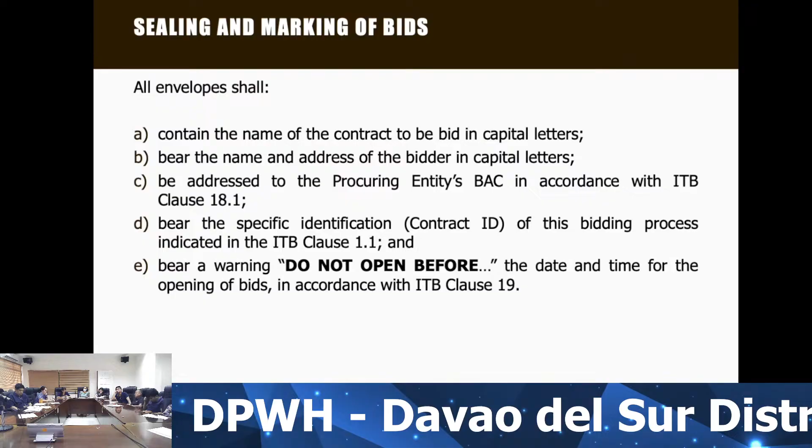All envelopes shall contain the name of the contract to be bid in capital letters, bear the name and address of the bidder in capital letters, be addressed to the procuring entity's bids and awards committee in accordance with ITB Clause 18.1, bear the specific identification of this bidding process indicated in ITB Clause 1.1, and bear a warning: do not open before the date and time for the opening of bids, in accordance with ITB Clause 19.

For manually submitted bid envelopes that are not properly sealed and marked as required in the bidding documents, the same shall be accepted, provided that the bidder or its duly authorized representative shall acknowledge such condition of the bid as submitted. On the other hand, unsealed or unmarked bid envelopes, or bids that cannot be opened or corrupted in case of online submission, shall be rejected.

The Bids and Awards Committee shall assume no responsibility for misplaced or lost contents of the improperly sealed or marked bid, or for its premature opening.

Bid documents must be prepared on A4 size paper and properly labeled with ear tag, matching those on the checklist. All supporting documents, photocopied from the original, shall be legibly readable and will be authenticated as needed during the post-qualification process. Illustration for the sealing and marking of bids.

The bidder shall submit one original and one copy of the technical and financial components of its bid.

Submission and receipt of bids. Bid submission may be done manually or electronically. However, bidders should only select one mode of submission, either manual or electronic online.

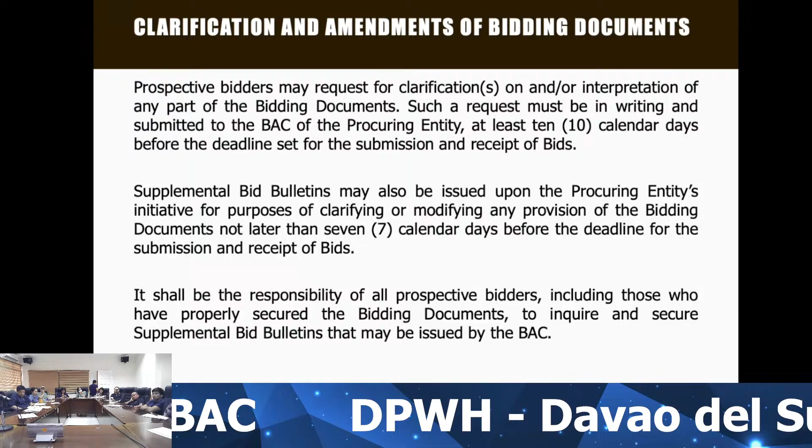Supplemental bid bulletins may also be issued upon the procuring entity's initiative for purposes of clarifying or modifying any provision of the bidding documents, not later than 7 calendar days before the deadline for the submission and receipt of bids. It shall be the responsibility of all prospective bidders, including those who have properly secured the bidding documents, to inquire and secure supplemental bid bulletins that may be issued by the Bids and Awards Committee.

Eligibility criteria, evaluation. Eligibility criteria shall be in accordance with Section 52.4.2 of the IRR of RA 12009. Eligibility evaluation for the procurement of locally funded civil works contracts shall be conducted electronically using the Civil Works Registry pursuant to Department Order Number 64, Series of 2012.

Contractors who wish to participate in the bidding are encouraged to enroll in the DPWH Civil Works Application, or CWA, at the Procurement Service, 5th floor DPWH Building, Bonifacio Drive, Port Area, Manila, while those already enrolled shall keep their records current and updated. Preliminary examination of bids.

The Bids and Awards Committee shall open the bids in public immediately after the deadline for submission and receipt of bids, as specified in the bid data sheet. In case the bids cannot be opened as scheduled due to justifiable reasons, the Bids and Awards Committee shall take custody of the submitted bids and reschedule the opening on the next working day, or at the soonest possible time, through the issuance of a notice of postponement to be posted on the PhilGEPS and DPWH websites.

The Bids and Awards Committee shall open the technical and financial proposals on the same day. The bidders or their duly authorized representatives may attend the opening of bids.

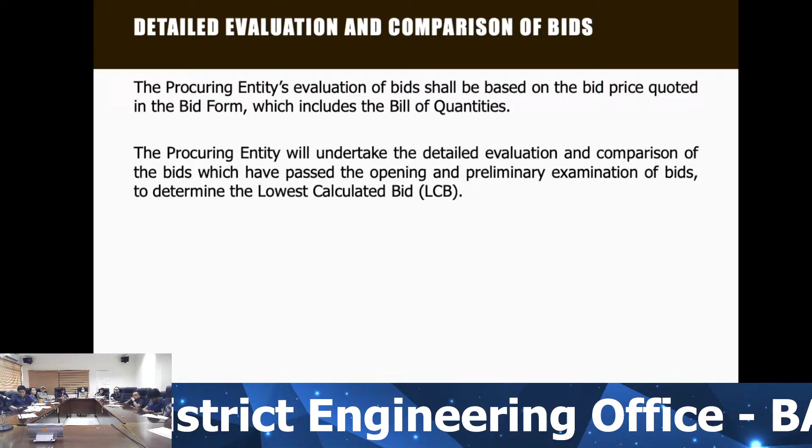Detailed evaluation and comparison of bids. The procuring entity's evaluation of bids shall be based on the bid price quoted in the bid form, which includes the bill of quantities. The procuring entity will undertake the detailed evaluation and comparison of the bids which have passed the opening and preliminary examination of bids to determine the lowest calculated bid, or LCB.

The Bids and Awards Committee shall immediately conduct a detailed evaluation of all bids using non-discretionary criteria considering the following: A, completeness of the bid. Bids not addressing or providing all of the required items in the bid data sheet shall be considered non-responsive and thus automatically disqualified. B, arithmetical corrections.

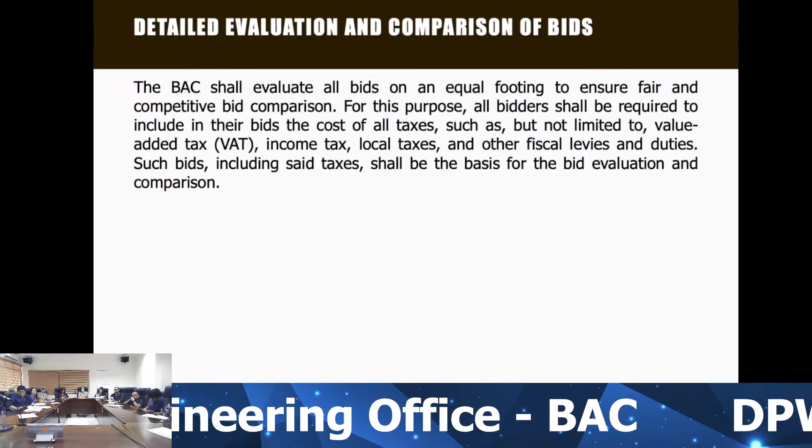The BAC shall consider computational errors and omissions to enable proper comparison of all eligible bids. Any adjustment shall be calculated in monetary terms to determine the calculated prices. The BAC shall evaluate all bids on an equal footing to ensure fair and competitive bid comparison. For this purpose, all bidders shall be required to include in their bids the cost of all taxes, such as but not limited to value-added tax, income tax, local taxes, and other fiscal levies and duties. Such bids, including said taxes, shall be the basis for the bid evaluation and comparison.

Post-qualification. The BAC shall determine to its satisfaction whether the bidder that is evaluated as having submitted the lowest calculated bid complies with and is responsive to all the requirements and conditions specified in ITB Clause 5 and 12. The determination shall be based upon an examination of the documentary evidence of the bidder's qualifications submitted pursuant to ITB Clause 12, as well as other information as the procuring entity deems necessary and appropriate, using a non-discretionary pass or fail criterion, which shall be completed within a period of 12 calendar days.

If the BAC determines that the bidder with the LCB passes all the criteria for post-qualification, it shall declare the said bid as the lowest calculated responsive bid and recommend to the head of the procuring entity the award of contract to the said bidder at its submitted bid price or its calculated bid price, whichever is lower.

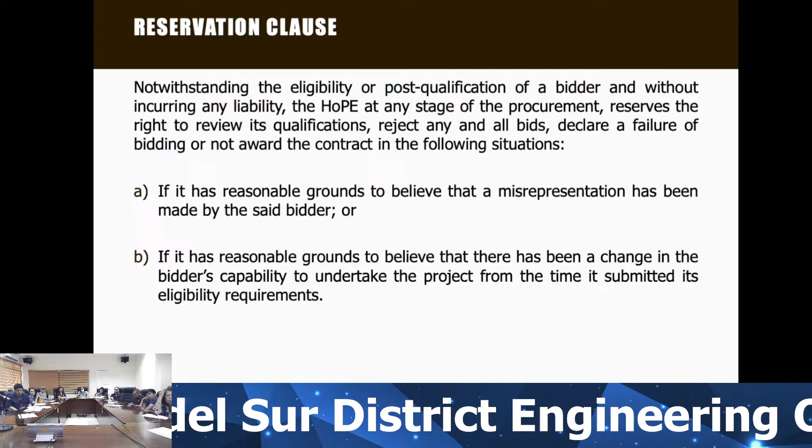Reservation clause. Notwithstanding the eligibility or post-qualification of a bidder, and without incurring any liability, the head of the procuring entity, at any stage of the procurement, reserves the right to review its qualifications, reject any and all bids, declare a failure of bidding, or not award the contract in the following situations.

A, if it has reasonable grounds to believe that a misrepresentation has been made by the said bidder. Or B, if it has reasonable grounds to believe that there has been a change in the bidder's capability to undertake the project from the time it submitted its eligibility requirements.

Should such review uncover any misrepresentation made in the eligibility and bidding requirements, statements or documents, or any changes in the situation of the bidder which will adversely affect its capability to undertake the project so that it no longer meets the prescribed eligibility or bid evaluation criteria, the procuring entity shall consider the said bidder as ineligible and disqualify it from participating further in the bidding process or being awarded the contract.

Award of contract. The head of the procuring entity shall award the contract to the bidder whose bid has been determined to be the lowest calculated responsive bid, or LCRB. The procuring entity shall notify the winning bidder in writing that its bid has been accepted, through a notice of award duly received by the bidder or its representative personally.

End of presentation. Thank you.

For agenda number 2, any questions or comments from the interested bidders and or representatives of the procuring entity?